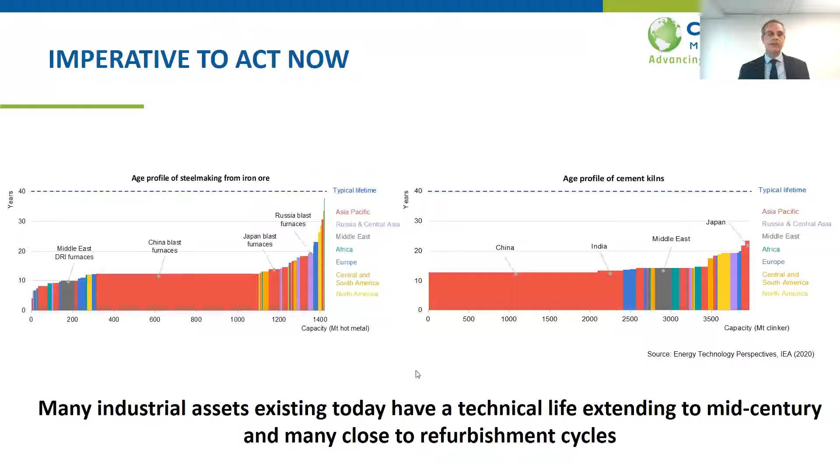And there's also no one path to net zero. I don't think that'll surprise anyone. Net zero commitments have been a very important factor in terms of really focusing minds on industry, recognizing that there's nowhere to hide. We need to be thinking about these things that we were kind of putting off until tomorrow. But in terms of the solution set, there's no one path to net zero for industry, and we need to recognize that.

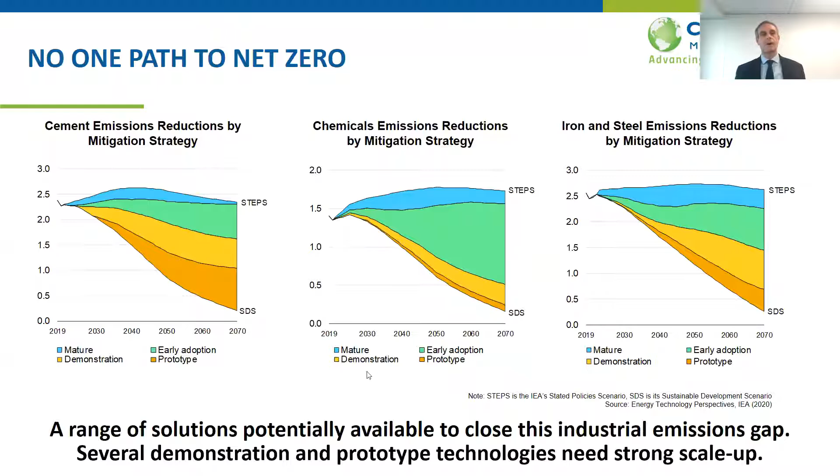So the time for great action on industry is unquestionably now. The IEA and others have mapped out the policy pathways for achieving it, but there's still a lot to be done in terms of acting upon it. And in doing so, it's also a case that many of these policy prescriptions would benefit from some form of multilateral coordination and collaboration. And obviously that's where we and others come in.

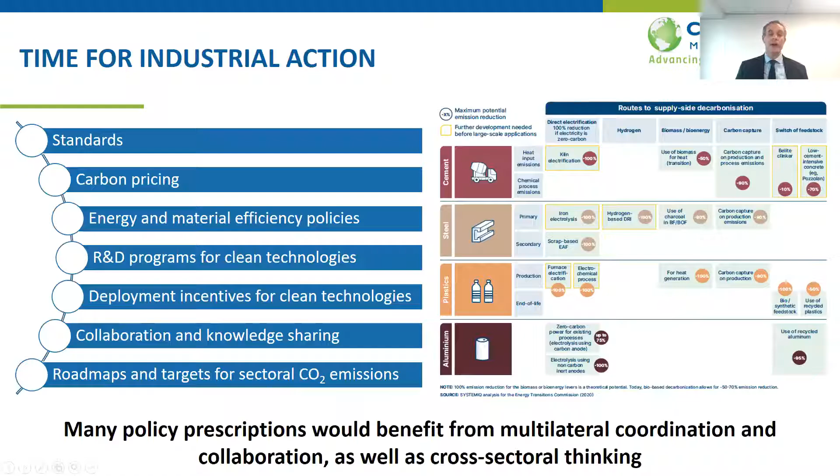They would also benefit from cross-sectoral thinking, which is another thing that we're able to do with our community. So this is one other example - these are obviously some of the big consumers of energy, and their path all the way through the supply chain, all the way through to the end consumption point. It's really important to be thinking about that whole journey and mapping that whole journey, and thinking about where the opportunities are to reduce or fully decarbonize at different parts of that journey.

And in scoping our initiative on industry, we obviously wanted to look at the existing landscape for international collaboration, make sure that we weren't duplicating, not trying to solve a problem that's already being solved, but if there were opportunities to do something that was in some way positive and reinforcing and filling a gap that needed to be filled, then we could step in to help with our government-led platform.

And so we need to both scale up domestic and international efforts, private sector and public sector. And as I say, there are several existing and emerging multilateral initiatives, some focused on the private sector, such as maybe LeadIT or Mission Possible Partnership, and then others coming in focused on building the evidence base or mapping the pathways, some on proving prototypes and demonstration. But they're all pretty new, I would say. And, if I'm honest, most of them are also still relatively small.

We're all talking to each other and all trying to ensure that we complement and amplify one another's efforts and not duplicate them, as I say.

And there are quite literally several pieces to the puzzle on this chart, and they're generally pretty complementary. It creates a coordination challenge, no doubt, but in all of our interactions with our other partners, it's clear that it's very manageable. The aggregate is that we need to see these initiatives scale very quickly, because speaking candidly, my biggest concern at this stage in terms of international collaboration on decarbonising industry is that while there may be several activities underway, they're not yet at the scale that we need to see. And I don't think that's a great surprise.

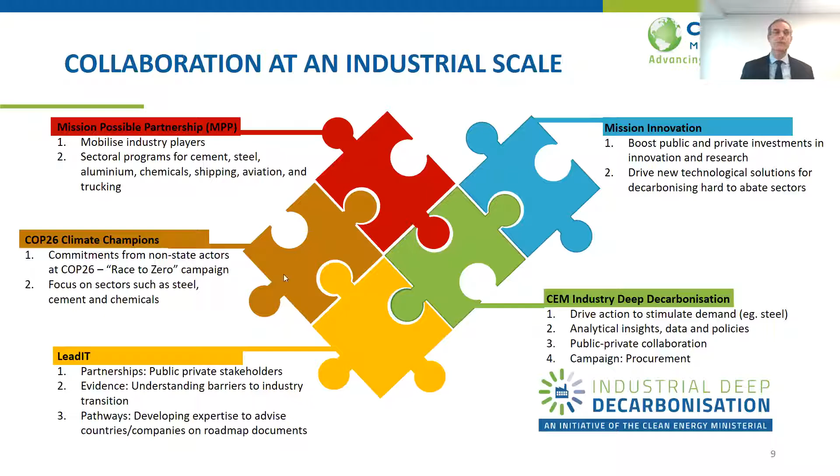So then moving to the CEM Industrial Deep Decarbonisation Initiative, which, as Michael said, was launched just a few weeks ago. The overarching objective of the CEM initiative is hopefully simple and obvious - it's about rapid acceleration of actions to decarbonise energy intensive industries. In terms of products, the initiative will focus initially on steel. And as a body, CEM is primarily focused on the deployment end of the spectrum, trying to pull things into the market and get them to scale up.

The choice and the focus from our members here is really about how do we create the demand environment to pull these products through into the market and help them scale up and commercialize. So it's really about actions to drive up demand for these products first and foremost, as part of the broader goal of market creation and, in parallel hopefully, cost reduction as that market grows.

And of course, these are all global products. Global coordination and learning is required. We're very conscious of trying to avoid the first mover disadvantage in this space, and therefore building regional and global scale demand is very much seen in our community as being to the benefit of all - justifying the investment in the first place and getting the cost down for everyone.

We've already done a bit of work around the Green Public Procurement campaign. Some early work on the role of Green Public Procurement has been undertaken and published to inform this upcoming campaign. It was released at our CEM 12 Ministerial meeting and highlighted 7 important steps which will inform both the campaign and the initiative going forward.

As I said earlier, one of the great things about these CEM work streams is that they're very flexible, and so I expect that what I've outlined today will form the basis of the CEM's work on industry, which will evolve quickly over time - which it actually absolutely can do within our structures. One example of that potentially going forward is by partnering with some of our other work streams and communities, such as on clean hydrogen, such as on CCUS, etc.

So just in closing, we need to have seen, in my view, the last of the typical route to industrial development. We need to see a clean industrial revolution, not as an afterthought, but very much as a first thought. I think there is, from the experience I've seen of the last 12 months, such as in the G7, a real step change in the political and policy attention given to industrial decarbonisation. It's no longer being viewed as something for tomorrow.

But the actions that brings with it means we really need to still move very rapidly from where we are today, from demonstration, get as quickly as we possibly can from demonstration to niche to massive scale. I think some of the things that will help us do that is thinking holistically in terms of the solutions, the geographies, the public-private collaboration, thinking all the way across supply and demand. As I said earlier, no one solution fits all.

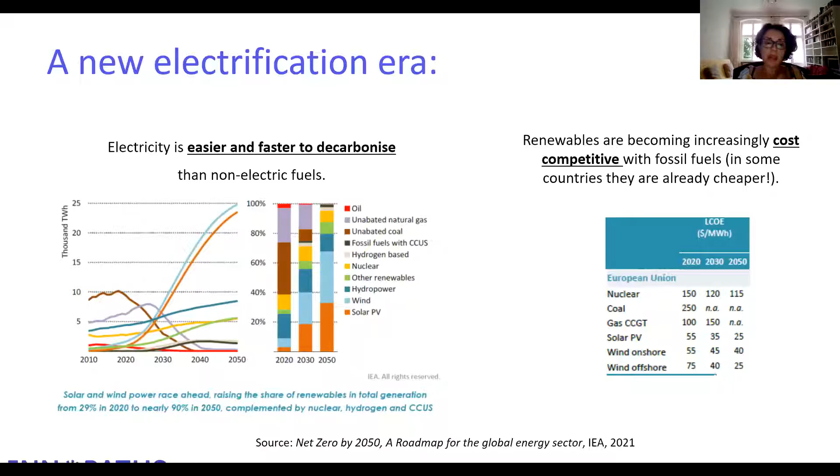So last year, with my team, we published a study where we looked at the CO2 reduction potential for European industry via direct electrification of heat supply. In this paper, we identified available electric technologies for industrial applications, and we estimated the technical potential for electrification.

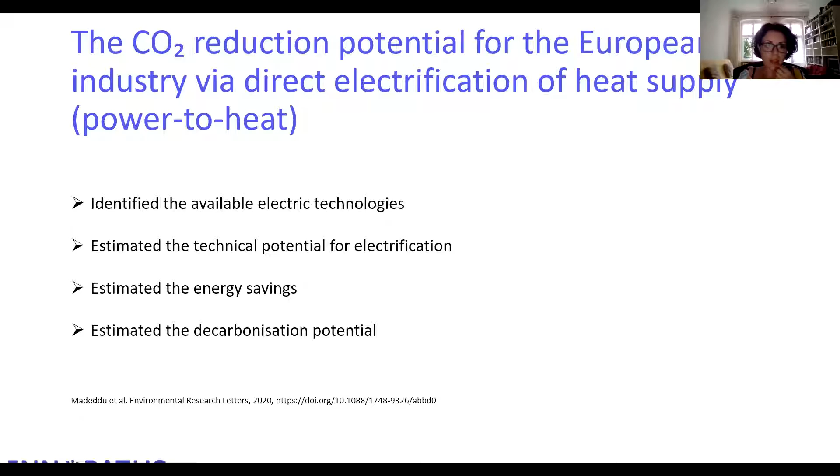We tried to quantify the energy savings and also estimated decarbonization potential. So now I will go through the results of this paper.

We started by looking at the energy use in the European industry. We took into consideration 11 industry subsectors, which account for more or less 90% of the final energy demand and CO2 emissions from the European industry.

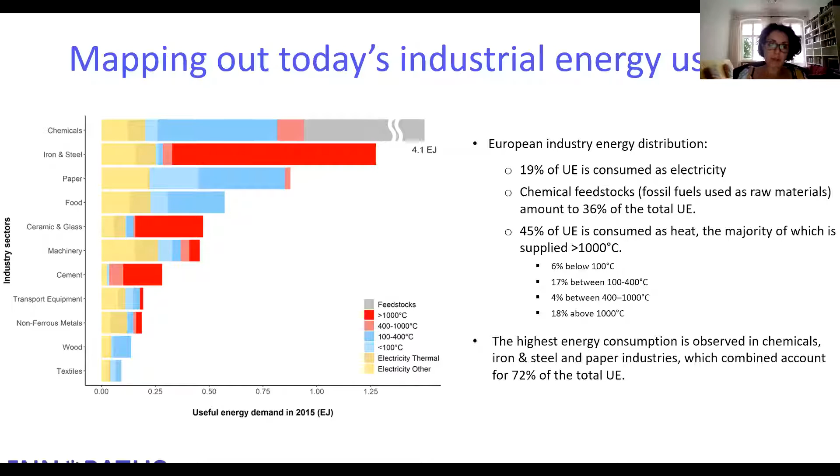As you can see, we have plenty of options to electrify industry, and they cover most of the temperature spectrum relevant for industrial processes, including very high temperature. These technologies are mostly already mature, fully developed, and available to be readily implemented in industry.

What we found, though, is that industry normally does not opt for electrically powered technologies because electricity is much more expensive than, for example, gas. On average in Europe, we have a price ratio of 3 to 1, so electricity costs more or less 3 times more than gas.

So obviously, when industry has to choose an energy carrier to power their large production volumes, they opt for gas rather than electricity.

We also found that electrifying the industrial processes could lead to energy savings because electric power technologies are normally more efficient, or at least have comparable efficiencies. In particular, in our study, we estimated that with a full electrification of industry, we could cut final energy demand by 20%.

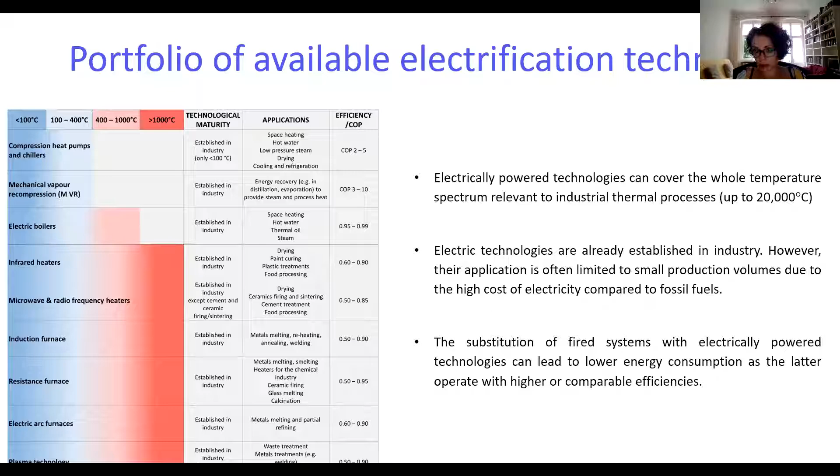After having identified the available technologies, we tried to sketch how the electrification of industry would happen. Because we don't expect electrification to happen overnight. This would be a slow or anyway complex transition. So we tried to envision progressive stages of electrification.

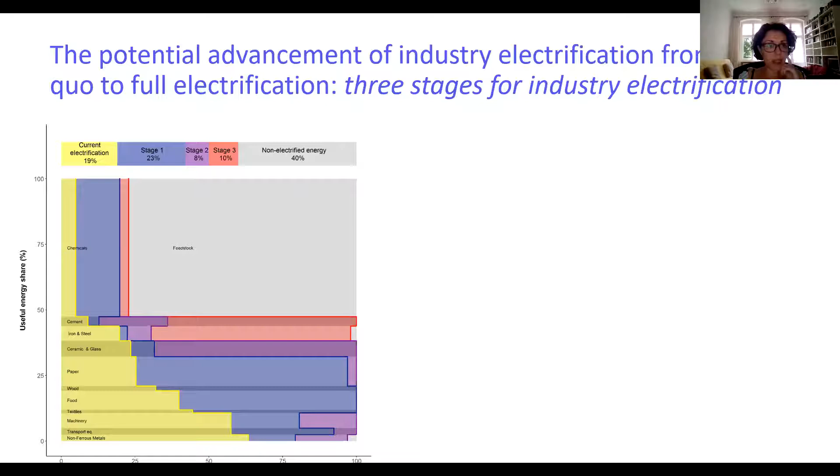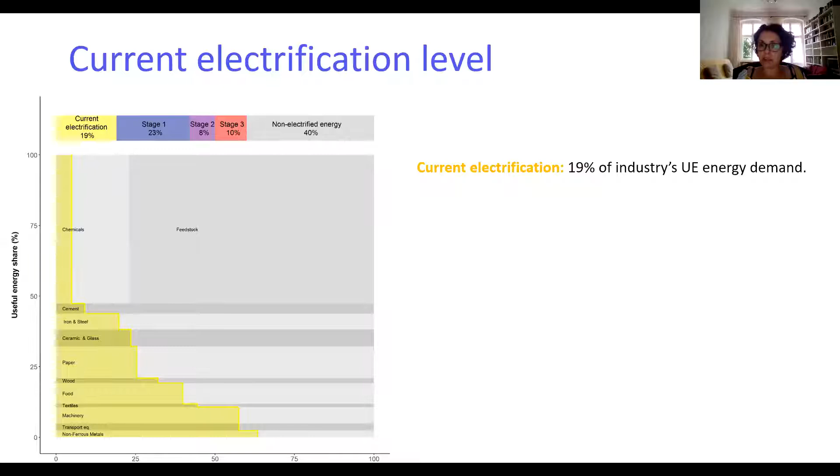We summarize this in this plot, and now I will explain how we did it. We started from understanding what is already electrified across the different subsectors, represented by the yellow shaded area in this plot. The electrification level is very different depending on the industry subsector, but it's in total around 19% of the useful energy demand, so there is huge potential to electrify more.

Then we tried to identify the entry points for industry electrification. If we had to start to electrify industry, what would be the low-hanging fruit? This is represented here by what we call stage 1, colored with this blue shaded area in the plot. What is included in stage 1 is basically technologies that are already fully developed, ones we know exist and that industry is familiar with, for example heat pumps, electric boilers, mechanical vapor recompressors.

We also identified processes that are operated at low and medium temperatures, so below 400 degrees, and processes that are common to all industry subsectors, for example steam generation, drying, and space heating. We think that electrifying these processes could be easy due to a joint effort. We also chose technologies based on the fact that they can be implemented in hybrid systems.

Because we are aware that for industry, the first phase of this transition would be important to have continuous production, so not having shutdown times, ensuring that there is energy to fuel the processes. This can be done at the beginning by having hybrid technologies, for example a gas and electric boiler, but also a gas boiler coupled with a heat pump.

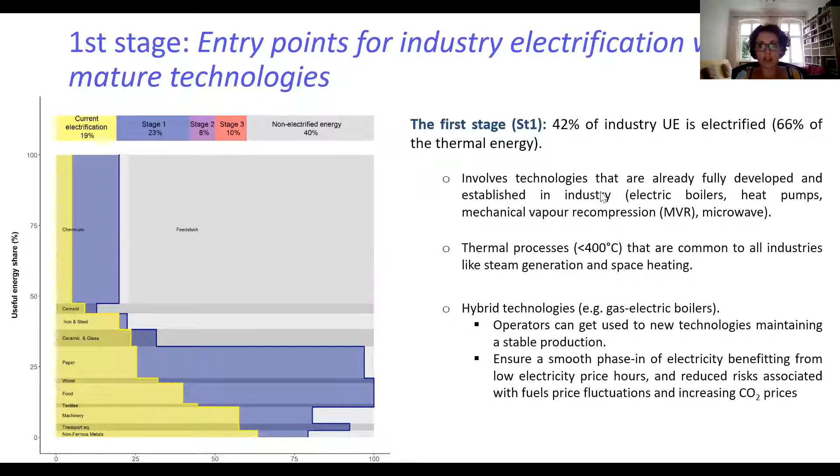So that we can ensure there is always energy supply and avoid risks due to price fluctuations that would put industrial production at risk. We quantified the electrification potential in this stage, and estimated that around 42% of the useful energy demand from industry could be electrified immediately with fully developed technologies, considering chemical feedstocks. But if we remove chemical feedstocks and consider only thermal energy, the potential could be 66% of the thermal energy demand from industry readily electrified.

Then we tried to identify the subsequent stage, stage 2. This is very similar to stage 1 in that it's also based on fully developed technologies, like electric furnaces, kilns, electric glass melting. The main difference with stage 1 is that the processes considered in this stage are sector specific. So for example, if we want to electrify glass melting, the electrification of this process will only rely on the efforts and technological upgrade of a single industry subsector, which requires different operating conditions depending on the glass product, for example. So much more complex, and we imagine this electrification would require a more substantial technological upgrade.

We estimated that electrifying the processes in stage 2, we would reach 50% electrification of the useful energy demand in industry. And if we exclude feedstocks, nearly 80% of the thermal energy demand from industry could be electrified with existing technologies, so we wouldn't need to consider technologies that don't exist or are not fully implementable.

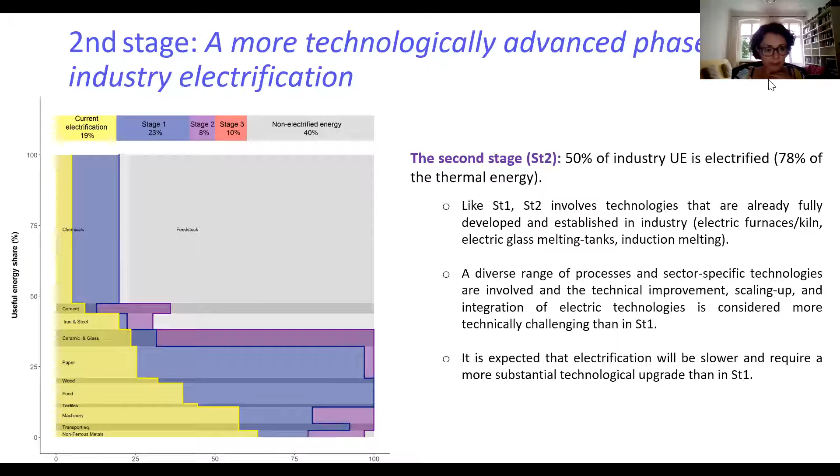Then we move to stage 3, and this stage in studies represents the maximum potential for industry electrification and includes technologies that have higher uncertainty, so technologies that are still under research and development, or that have other potential barriers. As you can see from the red shaded area of this plot, this involves the most energy intensive and CO2 intensive sectors, so chemical, cement, and steel.

In the case of chemicals and cement, we have similar issues. These technologies, for example to electrify crackers and reformers or electrify clinker production, are still under a development phase. They are not fully commercial, not fully scalable, so there is more uncertainty here.

In the case of steel, the problem is not technological maturity, because here we are assuming a full substitution of primary steel with secondary steel production. We know secondary steel production is fully developed, and industry is very familiar with this process. The problem here is how much scrap do we have available, and scrap is already highly recycled. So can we really have enough scrap to cover the full steel demand that we have today? This is really the main obstacle here.

And of course, we have to remind that this study is based on direct electrification. So we are not considering, for example, iron reduction with hydrogen, although this could be a way to electrify steel via indirect electrification. But this is not considered in this study. So anyway, the potential in this stage would reach 60% electrification, and if we exclude chemical feedstocks, nearly 100% of the thermal energy demand from industry could be electrified with technologies that are still under development.

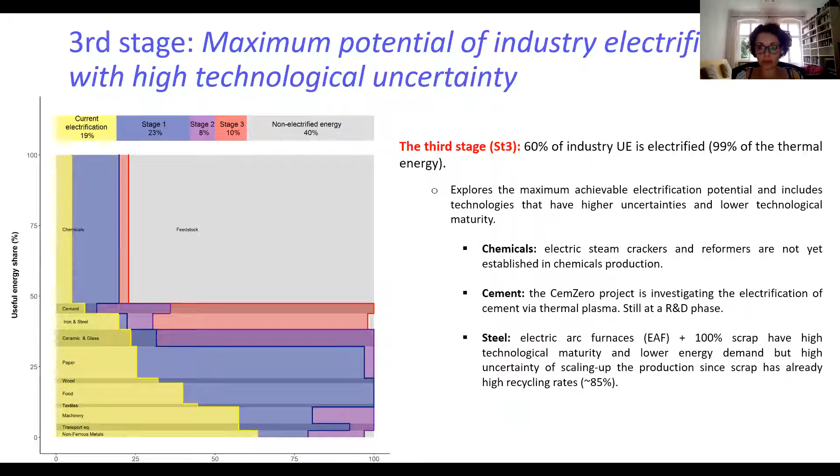After this, we tried to estimate the decarbonization potential through electrification. The question was really, can we actually cut emissions? In this plot on the left, you see the emissions from industry in 2015, divided into indirect, direct, and process emissions. Then we have the emissions in stage 1, stage 2, and stage 3 of electrification, depending on different carbon intensities of electricity.

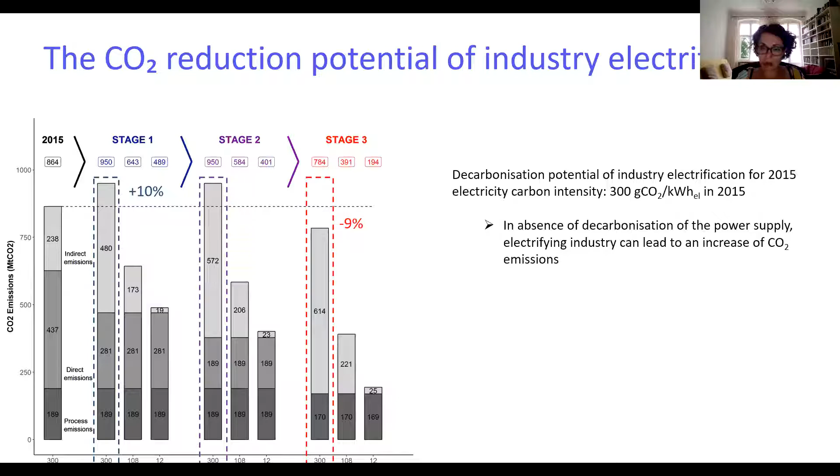We first considered the carbon intensity of electricity in 2015 in Europe, which was around 300 grams of CO2 per kilowatt hour. We see that actually electrifying stage 1 and stage 2 would cause an increase in emissions, because electricity has a higher carbon footprint than gas, for example. In stage 3, though, we would observe a decrease in these emissions, due to the fact that we have energy savings coming from offsetting primary steel production with secondary steel production.

So in total, we would observe a decrease in emissions. Of course, this makes clear that electrification of industry needs to go together with decarbonization of the power supply. So we tested what would happen if we had a lower carbon intensity of electricity in Europe, using values from the IEA Energy Technology Perspective for 2030 and 2050, corresponding to 108 grams and 12 grams of CO2 per kilowatt hour of electricity.

We see that by decarbonizing the power supply, we would see an immediate cut in emissions already in stage 1, not even the most advanced stage of electrification. If we progress further, in the best case scenario we can cut up to nearly 80% of industrial CO2 emissions. Looking at this bar, we see that we're reducing the bottleneck of industrial decarbonization down to process emissions — those emissions that cannot be cut via electrification.

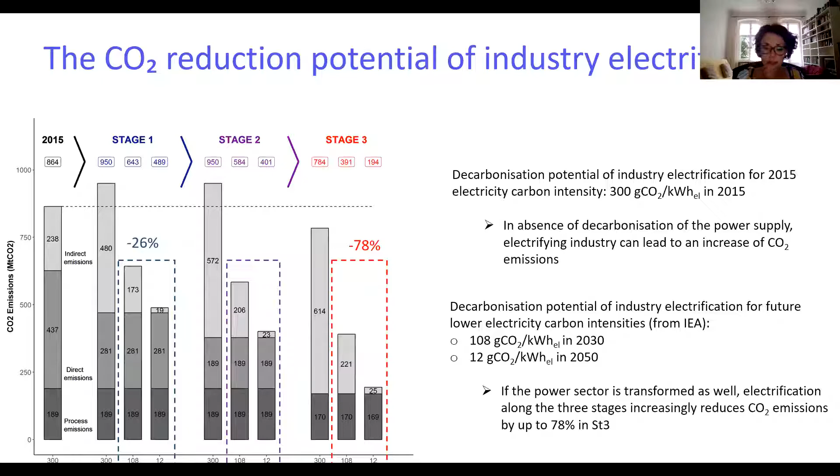In conclusion, we were able to identify barriers and enablers for a successful electrification of the industry sector. It is necessary, in order to have effective decarbonization of industry through electrification, that decarbonizing and expanding the power supply is a prerequisite.

In our study, we estimated that full electrification of industry would lead to three times more electricity demand from this sector. So we need to improve distribution and transmission grids, implement storage technologies, and face large upfront capital costs for this disruptive transformation in the power sector.

Industry will have to maximize demand flexibility and develop new smart approaches to peak load management. We need storage technologies, hybrid technologies, and increased on-site electricity generation to have greater autonomy and reduce the risk due to price volatility.

We also found that in most European countries at the moment, powering industrial systems with electricity would lead to a significant increase in production cost. From consulting industry representatives, we found that industry is very reluctant to invest in electrification, because at the moment it is simply not convenient to invest in electricity, considering the price ratio with fossil fuels.

So it's important that from a policy perspective, we give a clear signal to industry by reducing electricity taxation and levies, in order to create cost-competitive electricity relative to other fuels. And of course, also to give a clear signal by implementing a carbon price, so that this cost can be taken into consideration when industry plans investments for new infrastructures.

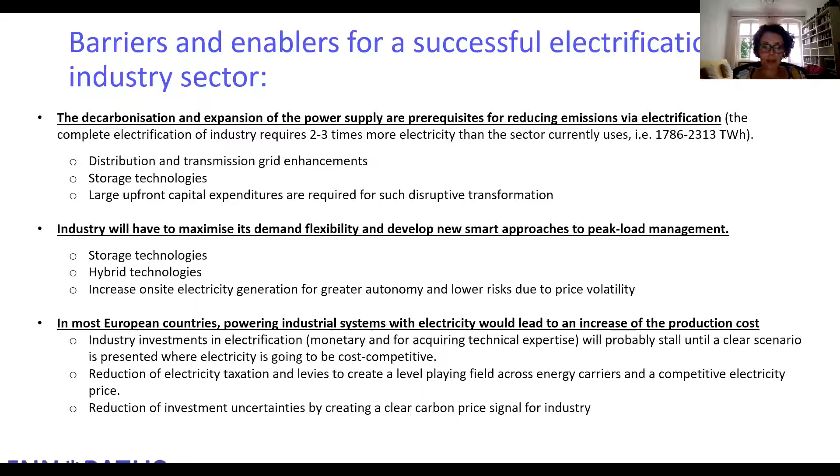That's it. Thank you very much for listening, and I hope this presentation was useful in some way.

Thank you very much, Silvia, a really fascinating presentation. Every time I see it, I learn something else.

We've done lots of other work about some of the other issues Silvia mentioned, to do with the decarbonisation of the power sector itself, storage technologies, grid reinforcement, and all those other things. And indeed on the carbon border adjustment mechanism, proposed by the European Commission to iron out some of those competitiveness issues related to decarbonisation of industry.

Okay, I'm going to go back to sharing my screen just to take you through a few more of the results from this project. So here we are, and that's where we got to.

One of our tasks was to do a number of case studies, across 4 different countries. We looked at some to do with the agricultural sector, biochar and livestock diet. We did a case study on building envelopes for new buildings rather than retrofit. We looked in detail at solar PV and wind, electricity smart meters, and then had some case studies on energy management — a very important aspect in energy intensive industries is to optimize the use of energy of whatever kind. We also looked at battery electric vehicles and transit.

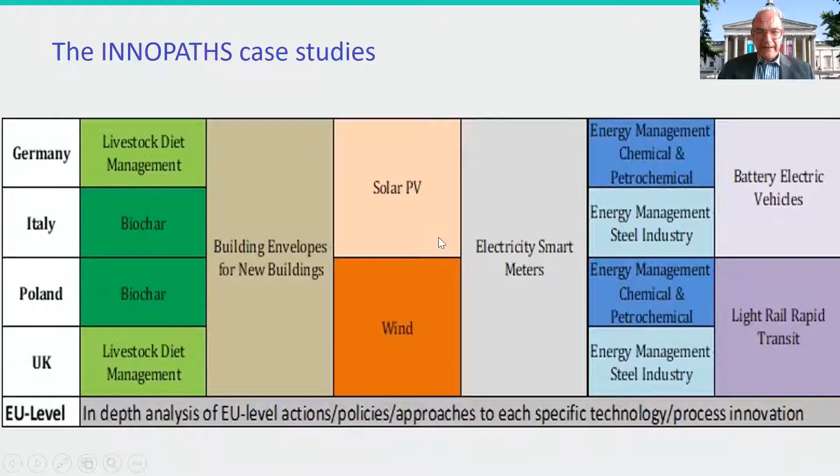I'm going to focus now on energy management in the steel industry — work done by Tadeusz Skoczkowski and colleagues at the Warsaw University of Technology. Across the case studies, we found, as Silvia just said, that cost is important in terms of innovation, which is pretty obvious. As Dan said, and as we found in the other case study, several technological configurations for decarbonisation exist in most sectors. It requires the concerted action of a diversity of actors at multiple scales.

And again, we saw that from the Clean Energy Ministerial presentation. It's really important to direct this innovation. Most innovation in the pre-decarbonisation era was directed simply by a desire for profitability, and obviously you get a certain kind of innovation under those circumstances. If you're wanting decarbonisation, that's got to be an absolutely core part of the value system playing into the innovation system.

Very important role for Europe, as opposed to just national governments. It was very clear in our case studies across these four countries that sometimes the European level played an enormously important part in stimulating innovation. And when it happens, many things just seem to fall into place. You've got different sets of actors, overlapping roles, authority pushing in the same direction, important technology push, important demand pull, as Dan Dorner was saying, and very important research and innovation sectors of the economies, both in the private and public sector, et cetera.

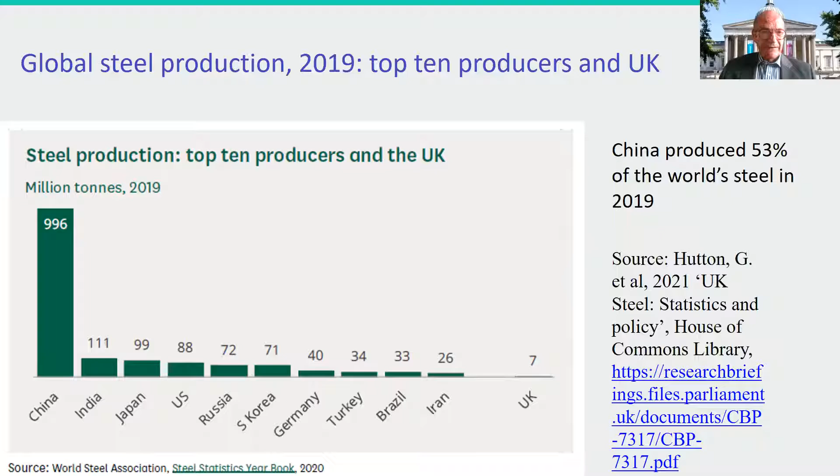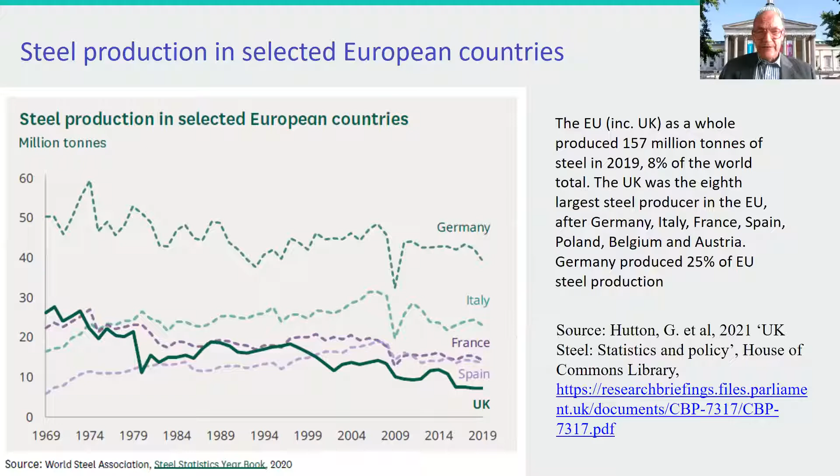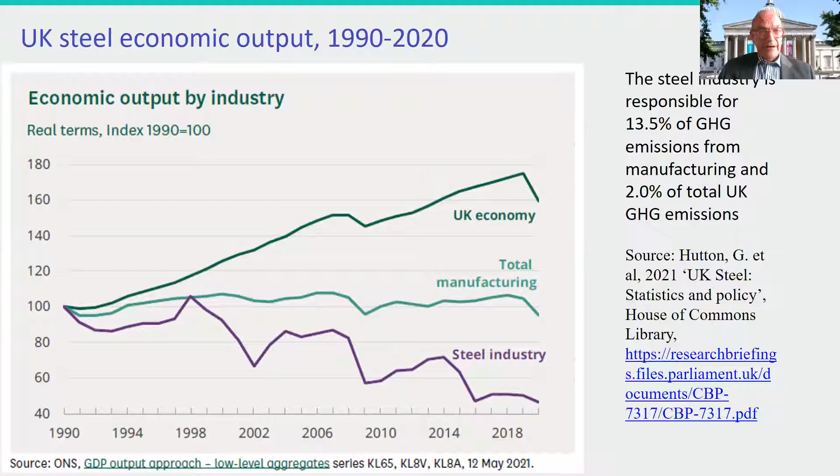The European steel industry, as many of us will be aware, has had a rocky 20 or 30 years. And the UK in particular, the steel industry has declined substantially since about 1970. Economic output from the UK steel industry has fallen by nearly 60% in the 30 years since 1990, but it still accounts for 13.5% of greenhouse gas emissions from UK manufacturing and 2% of total greenhouse gas emissions. So it's still very much significant in that context.

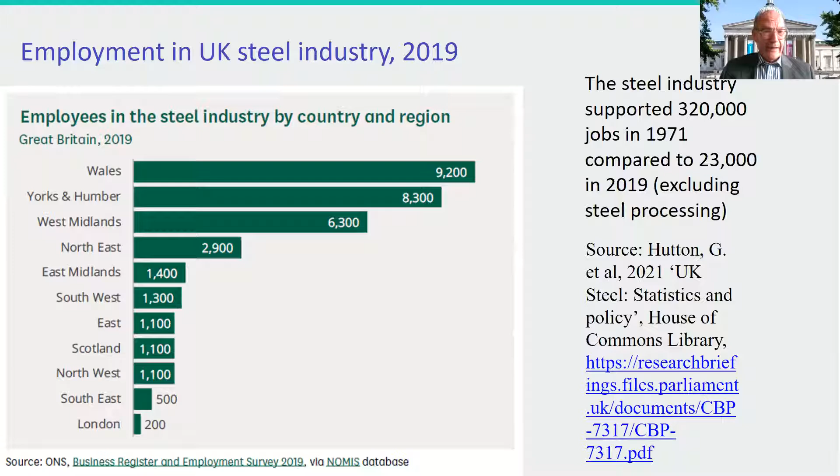And politically, of course, it's important in that although it employs a tiny number of people compared to what it was - its employment has fallen by about 90% from the middle of the last century - it's still about 23,000 people, and they're very concentrated in certain parts of the country.

So what did we learn in the case study that we did? You can find all these case studies and indeed all the INNOPATHS deliverables on the website. As we know, there are two main routes to produce steel: there's the integrated route with blast furnaces and basic oxygen furnaces, and then there's the electric arc furnaces, which use scrap, as Silvia said, and they consume about 80% less energy.

The deep decarbonisation of steel will require breakthrough technologies, and I think Lars is going to talk a little bit more about those later today.

They've been amazingly successful in terms of reducing their specific energy consumption, that is the quantity of energy per ton of steel produced, and in Europe it's among the lowest in the world. Therefore, it wouldn't make any sense at all for the EU to reduce its emissions by outsourcing steel making to other parts of the world, because that would simply increase global carbon emissions where that steel is being made less efficiently. So it's very important that the EU steel sector, for as long as we're going to continue to use steel, that we do make it.

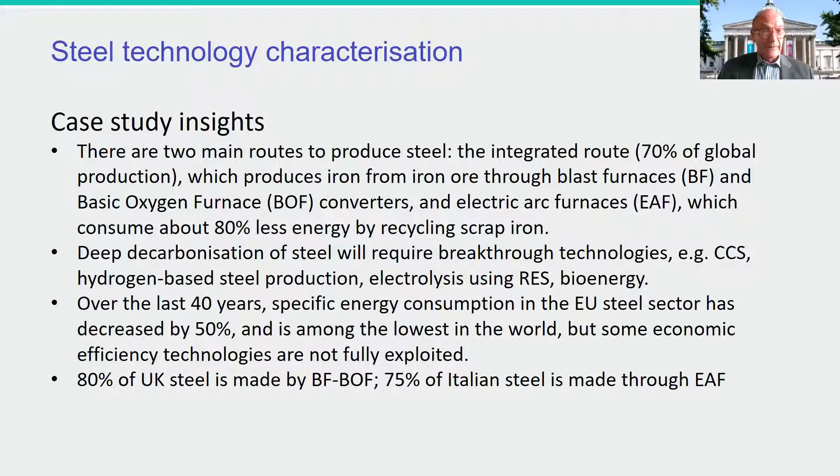So rather busy slide here. I've tried to emphasize some of the points that came out of the case study in terms of energy management. Energy costs are huge, and when you talk to the managers in these industries, they stress that they have had to, for competitiveness purposes, manage their energy and become as efficient as they can. But there is still further scope, even in Europe, for considerable increases in energy efficiency.

But there are large existing capacities with high emission technologies and long investment cycles. So if we're going to use these more efficient technologies, we need to start now and make sure we put them in now, because again, as Dan was saying, these technologies have long lifetimes. There's lots of R&D going on, but most of it is focused on these breakthrough innovations that Lars is going to talk about, and there's much less work on these incremental energy management innovations, and we'll discuss a couple of those in a minute.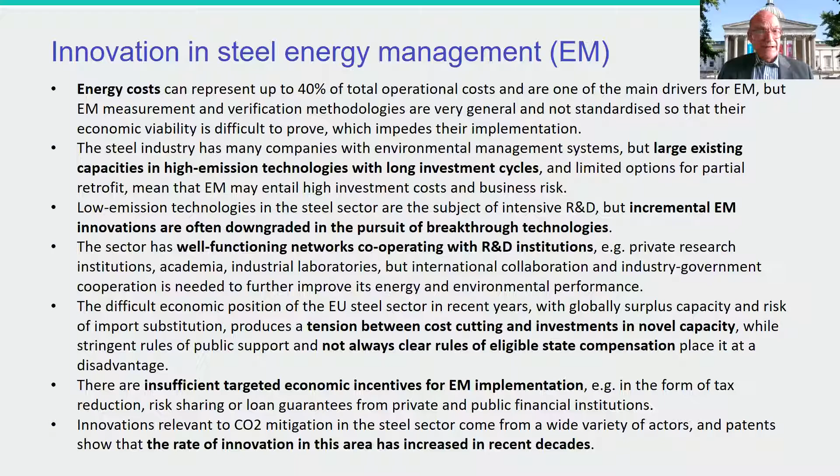But obviously, as we know, there's global oversupply of steel, and so the industry faces lots of challenges. Just a few thoughts there about that.

Italy. We looked at Italy and the UK in some detail. They've always put very high emphasis on energy efficiency. They've reduced their specific steel energy consumption. Obviously, this is at a much lower level because so much of their production of steel is through electric arc furnaces. There are various regulatory requirements for energy management. There's a national industry plan that supports private investment, and they're increasing public R&D resources substantially.

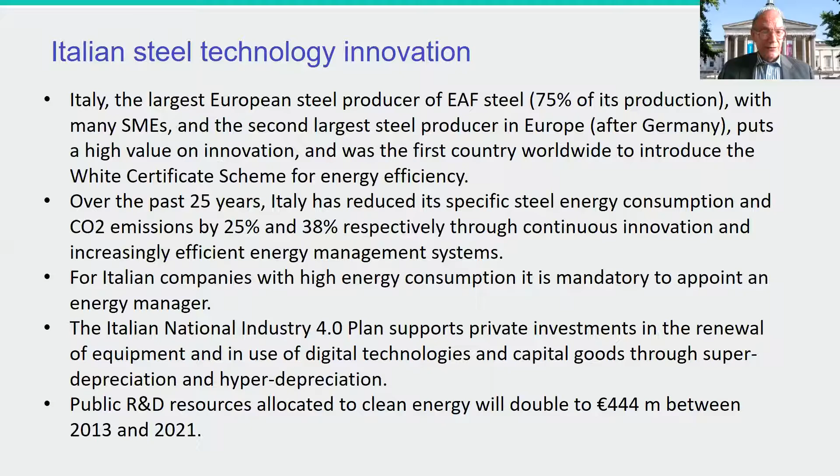The UK, I think, has been a bit slower in taking these things forward, but there was an industrial decarbonisation strategy published in March 2021. We've got 6 blast furnaces on 2 sites, which are important. I think I said earlier that 80% of UK steel comes from the integrated route rather than electric arc furnaces.

We could increase the number of arc furnaces with hydrogen replacing coal for use in direct reduced iron, and if we were to use some of our scrap for those purposes rather than exporting it, that would help. As Dan said, there's an absolutely crucial role for public procurement to support these green industrial products, not just in steel, but across the industry piece. It's very interesting to see the political debate now around public procurement helping to drive these processes forward.

Again, there are a couple of funds that are intended to help industry in general and the steel industry in particular to use energy more efficiently and to decarbonize more generally.

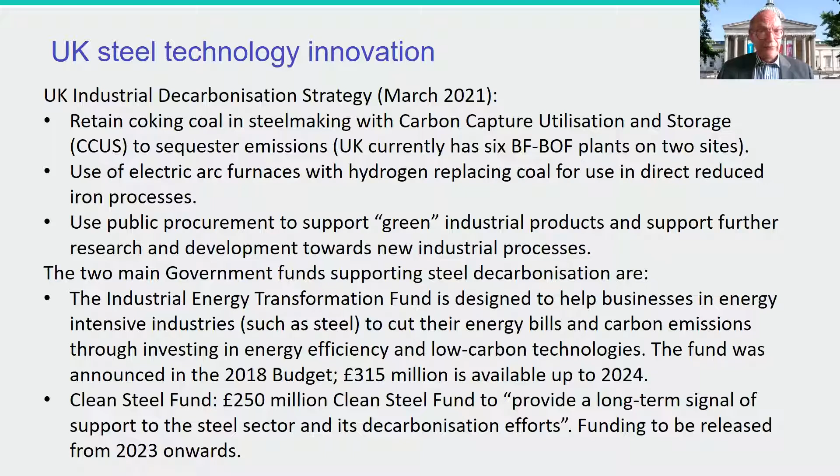There's a real challenge for increasing our electric arc furnaces in the UK. If we look at these 2 pictures, you can see that not only have electricity prices increased substantially in the UK since 2007, which is the left-hand graph, but UK electricity prices are substantially above the average EU industrial electricity price there. One of the reasons for this, which again is something that Silvia mentioned, is that for reasons best known only to themselves, the government, when it has been funding renewables and energy efficiency schemes of various kinds, has put the costs of those on electricity, not on gas, which of course is very much a perverse thing to do if what you're trying to do is increase the use of electricity. So removal of these various levies would seem to be a priority.

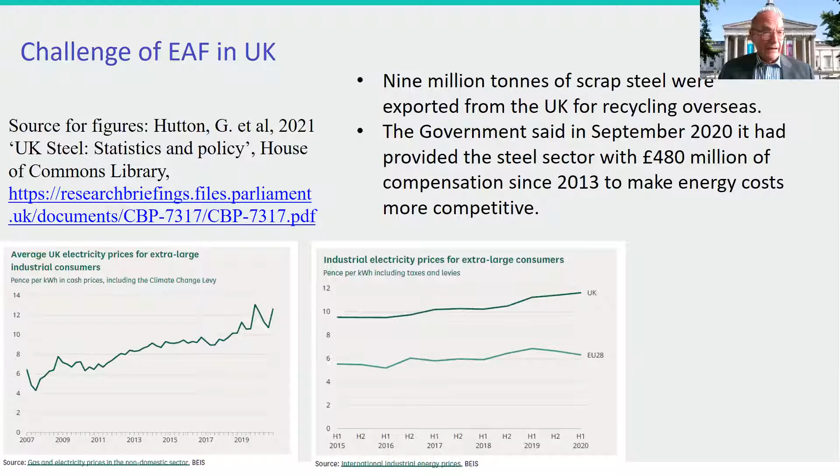As a result of that, of course, the government has had to compensate heavy industry for these high electricity costs. Otherwise, they would have been completely uncompetitive and would have gone out of business.

So the second part of my presentation, just for the last 5 or so minutes, asked the question: okay, so we've got these new breakthrough technologies that Lars is going to tell us about. How long will it take for them to go to scale?

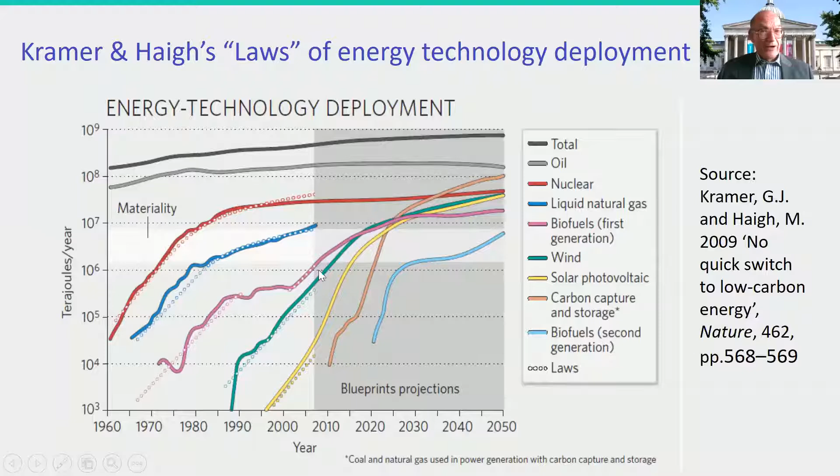There was quite an influential paper by Kramer and Haigh in 2009, where they basically said that for an energy technology to reach materiality, which is this white bar here between 10 to 6 and 10 to 7 terajoules per year, it needs about 30 years. Obviously 30 years is quite a long time, given that we're at 2020 and we want to get to net zero by 2050. So that again is a further reason for not leaving this to tomorrow, because you can't get up the deployment curve fast enough in order to get to net zero by 2050.

One of the pieces of work that we did, and this is my colleague Will McDowall at UCL with some others, was actually to have a look at various analyses of past technologies to see how quickly we might expect these new steel technologies to become significant. And there is this core periphery acceleration hypothesis here. If we look at the left-hand picture, you can see that the duration of diffusion, which is called delta T, from going from 10% to 90% of a new technology.

You can see that the early movers who are in the core, they take a certain amount of time. And in each case for these technologies, you can see that as the technology diffuses out to more countries, they take less time than the early movers in order to reach significant scale. And the question that Will and his colleagues were asking was, what's the evidence in steel technologies for this hypothesis?

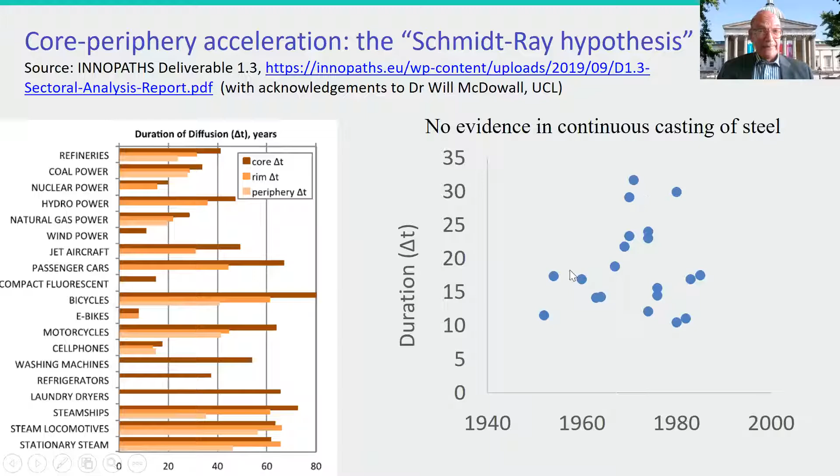And you can see from the right-hand picture that actually there's not a lot of it. Each of these dots represents a country that introduced continuous casting of steel, which was a major innovation in the steel industry. And you can see that the early movers back in the 1950s, 60s, it took 10 to 20 years for these guys to reach materiality from 10 to 90% of steel plants. And then the later arrivals in steel making, you can see it in many cases took them even much longer.

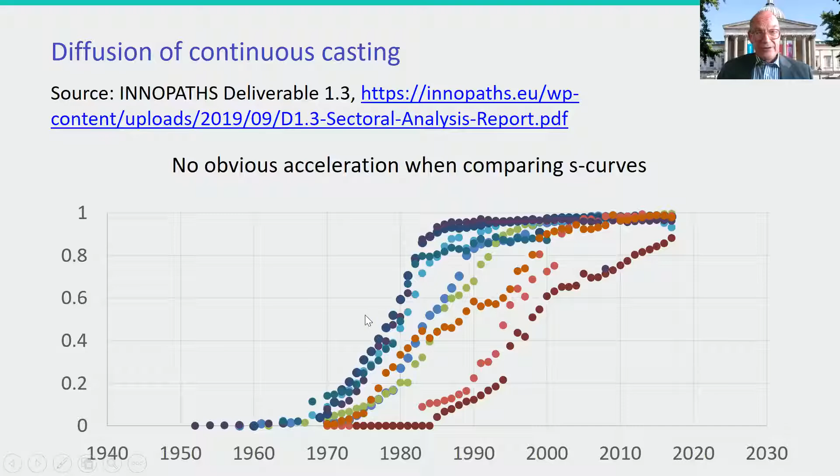Diffusion of continuous casting, if you plot logistic curves here for again the way these technologies were taken up, you can see there's no real evidence for acceleration. And if we look at a couple of the incremental steel efficiency options, top pressure recovery turbines and coke dry quenching, again, there's no obvious core periphery acceleration effect.

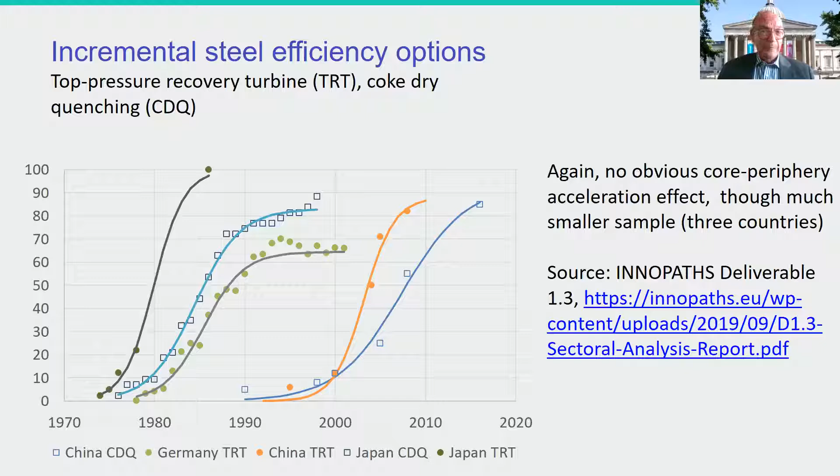So if we want to get these technologies to scale, we can't rely necessarily on the early countries making all the mistakes, introducing it, paying the price of what Dan called, I think, first mover penalties, and then allowing later countries to come in behind and hoping that they'll do it more quickly, because there's not a lot of evidence that that actually happens.

Direct reduced iron using hydrogen, how does that compare in the scenarios that have been put forward? How fast can we introduce it, for example, compared with continuous casting machines? And you can see that these two studies that Will has looked at, the TRANSRISK direct reduced iron scenarios and those by Morfeldt et al., you can see that those do sort of match the experience with continuous casting from both the Netherlands in this orange S-curve and the EU in the red S-curve, and the global continuous casting here more or less matches the experience of the scenarios of Morfeldt et al.

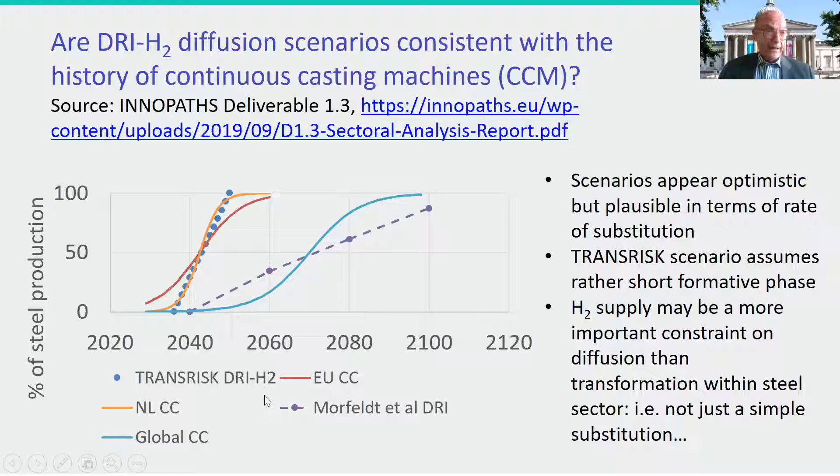So again, mixed evidence, but it looks at least feasible from that these scenarios could actually get these technologies in place in time. So just my final conclusions. Policy dynamics is important for environmental technologies, and late acceleration in some technologies is possible, but the evidence is mixed. That there is divergence among technologies, and we don't, I think, fully understand what it is that makes some technologies accelerate

among later adopters than early adopters. It's useful to look at some of these historical analogues and to compare them with the kinds of scenarios that Silvia was talking about earlier, just to see whether the rates of diffusion which they're postulating for these new technologies are at least comparable to the rates of diffusion in the past. So thank you very much.

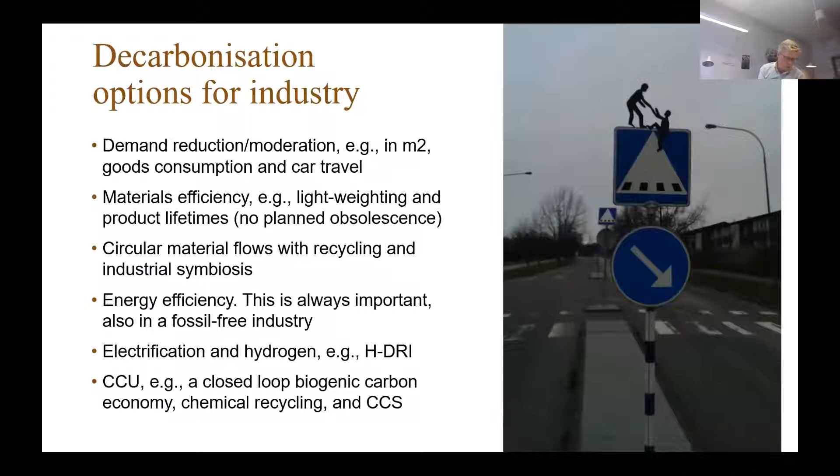But I will talk more about electrification, hydrogen, and CCU and CCS in this presentation. But let's not forget, of those options, we do have long experience from energy efficiency in industry, relatively high recycling of steel already, although it can improve. But I think the materials efficiency and demand slowdown or demand moderation options are underexplored and underutilized.

I would also like to give you a feel for what this is about. This is an old blast furnace in Russia. If you're interested in looking at more pictures, I really recommend the website by Viktor Macha, who has photographed hundreds of steel mills around the world. It's big units, it's noisy, it's hot.

A blast furnace can produce 400 tons per hour. We have 57 of them across Europe. I have 5 here in the UK. I think Paul said 6. And really high emissions, 2 tons of CO2 per ton of steel.

And what you do in a blast furnace is that you put your iron ore, pre-treated as iron oxide. You put it in there together with coal and coke, which produces a reducing atmosphere. And the whole idea is to strip the oxygen off the iron oxide and then get iron as hot metal, that you see in this picture.

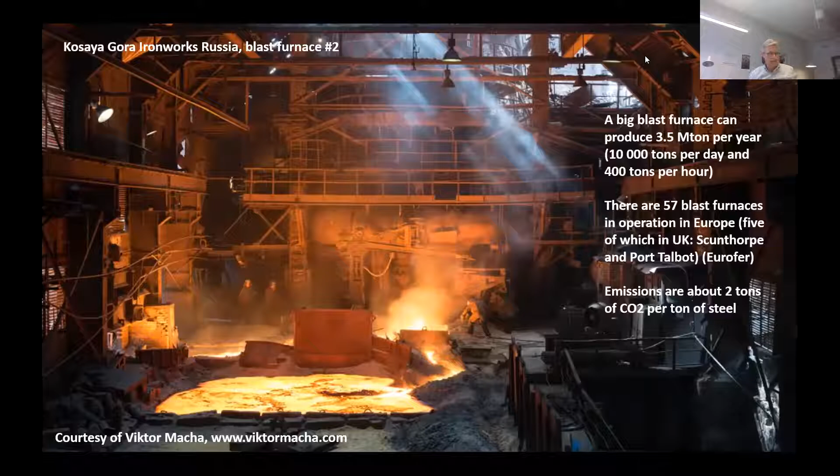If we think about the outlook for European steel production, this is a picture from one of our articles showing you production since 1990. You see the dip in 2008 with the economic crisis, but the current production is about 157 million tons per year.

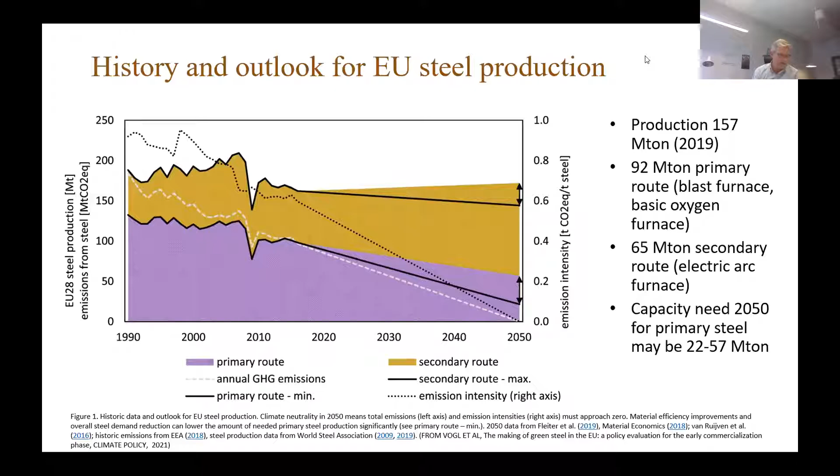A larger share of it is the primary route through the blast furnace and using basic oxygen furnace, 65 million tons in the secondary route with the electric arc furnace. But the projection is that there will be a lower need for primary production as we can increase the share of recycled. So a future capacity need for primary production may only be 22 to up to 57 million tons. So it's not only that we have to replace blast furnaces or equip them with CCS, it's also that we need less primary production.

Now, the options for decarbonizing steel. Eurofer, the European Steel Association in Brussels, talks about 2 main routes, or 3. It's the circular economy, which we will hear more about later. But for the primary production, it's called smart carbon usage and carbon direct avoidance. And with smart carbon usage, it involves both CCS and CCU.

But it's important to point out that CCU, taking blast furnace gases and turning them into chemicals or fuels or whatever, actually doesn't lead to zero emissions. It only shifts the carbon emissions to somewhere else. And with CCS, it's also difficult to get to zero because we have limited capture rates, especially if we go into existing plants where not all the emissions come in one stream.

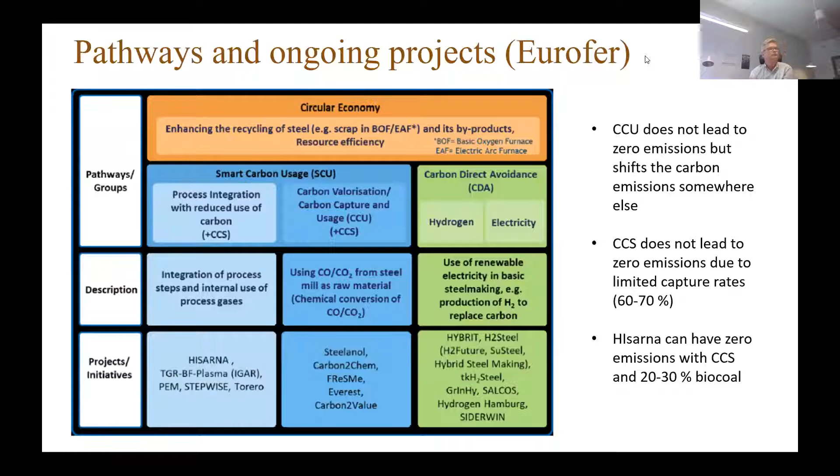Instead, I would like to shift and turn the attention to the idea of hydrogen steel making or electricity. Hydrogen reduction is one option. Electrolytic processes with electricity is also a possibility for the future, so-called SIDERWIN, but it's at a much lower technology readiness level. And it was an interesting shift, a real change.

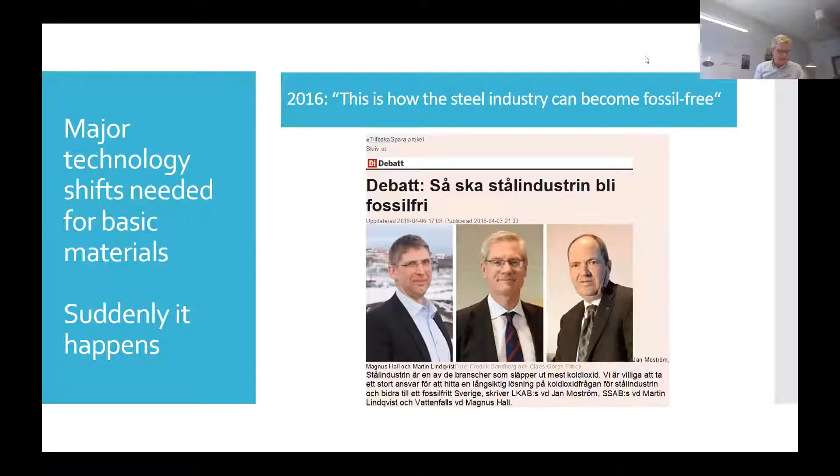In 2016, the CEOs of the Swedish companies - the mining company LKAB, the power company Vattenfall, and the steel company SSAB - joined forces and wrote an article in a Swedish business paper. You see it's pink, explaining how the steel industry can become fossil free, and sort of broke ranks with the rest of the European steel industry, who said there was no alternative to CCS. These guys came out and explained how hydrogen was an option.

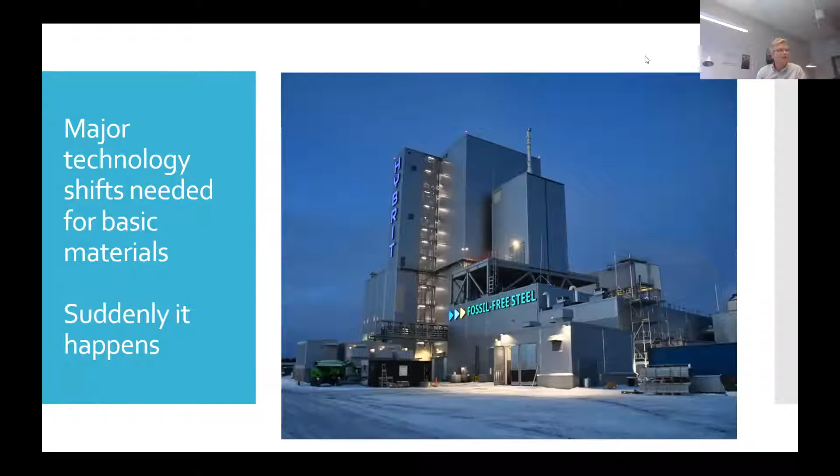Today, since last year, we have this pilot plant up in northern Sweden producing 1 ton per hour. Only in May this year, they have produced for the first time with 100% hydrogen direct reduction iron sponge in this plant. An interesting fun fact here is perhaps that the CTO of the steel company did research on hydrogen steel making already in the late 1980s at the Royal Institute of Technology, so perhaps that's where the seed was planted to do hydrogen reduction.

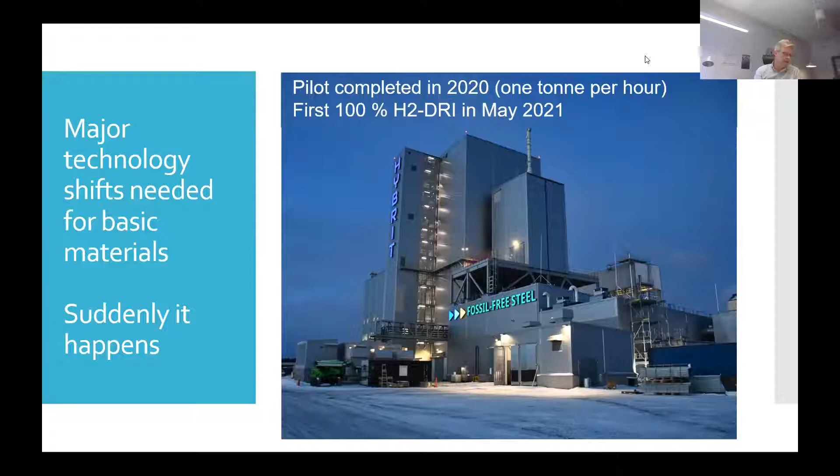The Hybrit project has also accelerated the plans to scale this up and moved it forward by 6, 7, or 8 years. So now the plan is to produce 1.35 million tons per year direct reduced iron using a 500 megawatt electrolyzer and using 5 terawatt hours of fossil-free electricity. This means that they will put fossil-free steel on the market in 2026. So things are moving ahead fairly quickly now.

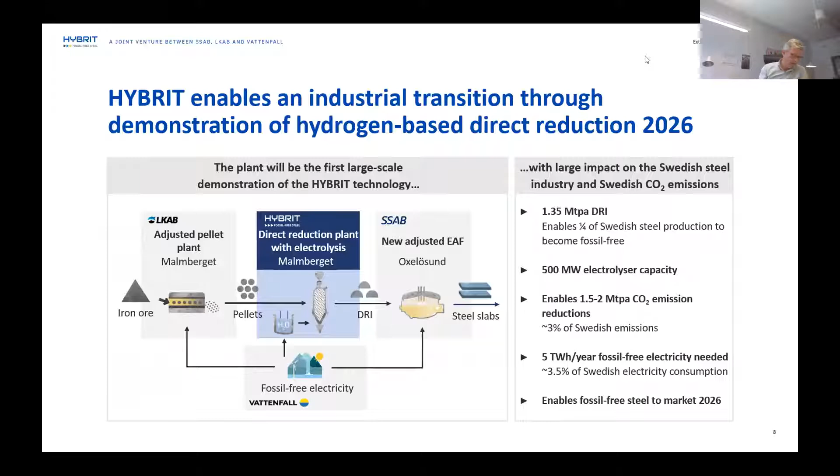We also see an increasing interest from steel users, especially the car industry, where Hybrit has an agreement with Volvo as cars become electric. For example, a Polestar Volvo all-electric battery car, if it uses clean electricity, has 0 emissions. But that car company is now worried about the embodied emissions, because the embodied emissions through the materials in the cars are equivalent to 26 tons of CO2, and they want to reduce that to 0 by 2030. So attention is really shifting to the embodied emissions in materials.

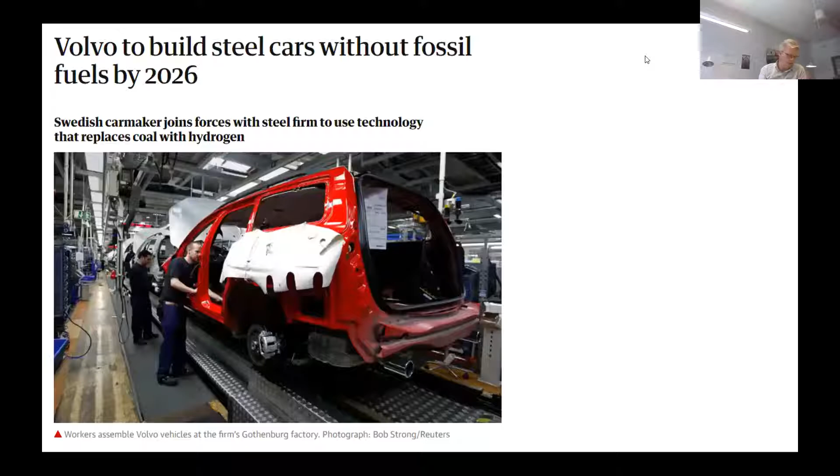We also have seen that the Swedish Hybrit project has been followed by another announcement, a greenfield hydrogen steel mill called H2 Green Steel in Sweden, where Mercedes-Benz has taken an equity stake. Scania, the truck maker, also gets involved with a stake in H2 Green Steel.

This is an interesting development, a strategic reorientation. When we asked Scania 5 years ago whether they would be prepared to pay a premium price for green steel, they said no, we won't do that. Then 2 years ago, their CEO stood up and said yes, we will buy green steel. And now they get engaged also in the production.

So even if Hybrit was the first project announced, it has since been followed by several other projects - German, Austrian: Voestalpine, Salzgitter, ArcelorMittal - even Chinese and Japanese companies are now taking an interest and moving in this direction. If you are interested and want to look more closely, there's a database called the Green Steel Tracker at the webpage of the Leadership Group for Industry Transition, and you have the link down here.

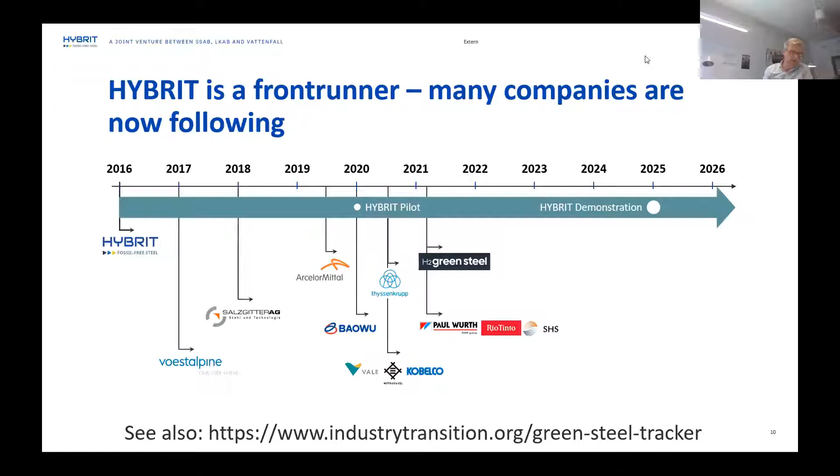So to sum it up, potentially a very large electricity demand is needed for converting or shifting the current steel production in Sweden. It would need roughly 15 terawatt hours. If we go for processing all the ore that is produced in Sweden with hydrogen reduction, we would need around 60 terawatt hours. For Europe, it means about 400 terawatt hours to convert everything to hydrogen.

So again, it underlines the importance of material efficiency and recycling. But it also means that we might need to think about potential relocation of industry - that future energy-intensive industries, including iron and steel, may relocate to renewable resource endowed regions where you have access to, for example, cheap offshore wind, as perhaps could be the case in the UK.

Another observation about this, which cuts across to other industrial subsectors, is that we're seeing these new value chains, new collaborations, and sectoral couplings. I think an important reason for Hybrit's success is that it has 3 companies, all headquartered in Sweden, with CEOs in Stockholm that can easily talk to each other and agree on what to do. So that has also been part of it.

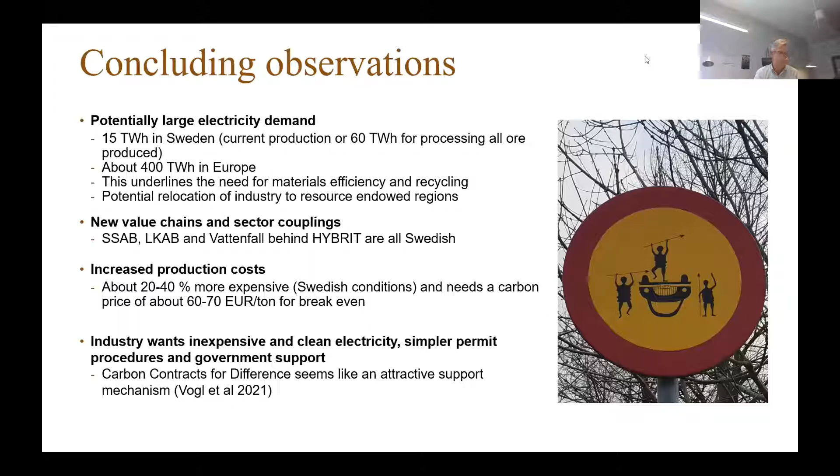And maybe on this note, Michael, coming back to your point about electricity, I think one development we will see is stronger couplings and collaborations between energy-intensive industries and electricity production, through power purchase agreements or direct ownership, as we saw, I think, last week or two weeks ago, the chemical company BASF announcing that they buy a 49% share of a big offshore wind park and enter a power purchase agreement for, I think, the whole production of that wind park. So that concludes my presentation, and I hope that allows us also some time for questions.

Thank you very much indeed, Lars. That was very interesting, and congratulations also to Sweden on those initiatives. Before we move to Q&A, we have two panelists and a respondent, so I'd like to move through those and then open up for questions and answers.

So the first panelist, clearly a view from Brussels at this time would be interesting. I'm delighted that we've got Milan Elkerbout. He's a research fellow at the Centre for European Policy Studies, the Energy, Resources and Climate team. Milan focuses on EU climate policy, the European emissions trading system, carbon pricing and industrial transformation. I believe the Commission package is supposed to be officially launched in less than one week, but has already been fairly widely leaked. So Milan, we look forward to hearing your own news and views on developments in the EU.

Yes, thank you very much, Michael. And indeed, we're less than a week away, although some of the leaks have definitely changed between the different iterations, so there might be yet more surprises next week.